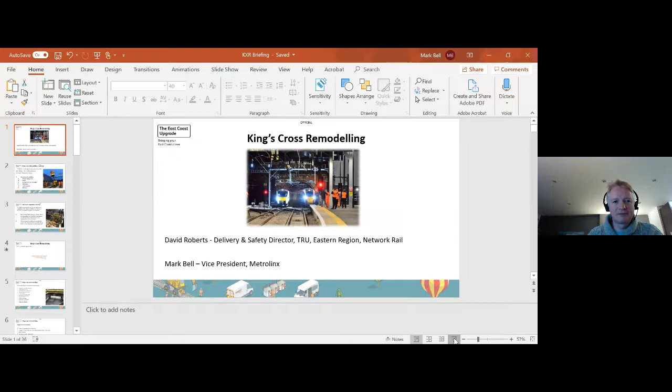Good evening, everyone. Just a bit of a brief background - David, I'm the delivery director for TRU at the moment. Going back six months, myself and Mark were leading the completion of the works at King's Cross. I'll let Mark give a bit of a brief overview of himself when he comes on in a bit.

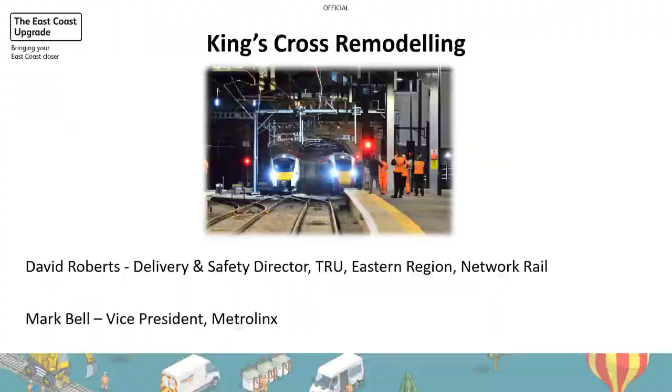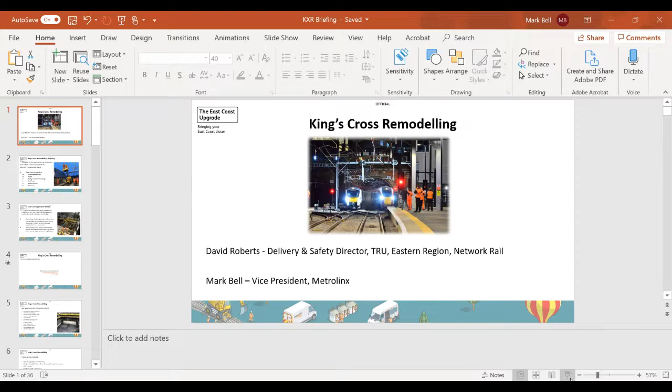At the time, I was the route delivery director for Network Rail on the East Coast. Tonight's presentation, we're going to run through King's Cross and the works that we did. We're going to go through the background, a bit on the scope, the challenges we faced, the civil scope in particular given the audience we're talking to tonight, the partial closure, which is one of the longest ones I've been involved in - a good 100-day plus closure, which was on top of a load of other quite significant closures we had during the works themselves. And then just a project summary at the end of the things we learned. So that's the idea for this evening.

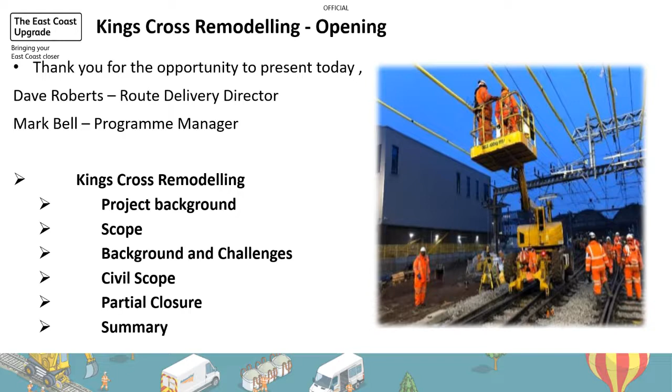In terms of the actual project itself, it's part of the East Coast upgrade, and effectively that's a £1.2 billion investment that the government, through Network Rail and the industry, committed to. Part of that was King's Cross, but it would be remiss of me not to talk about other works going on at the same time. These included Werrington grade separation, which is part of splitting freight off the main line just north of Peterborough - quite a significant scheme - and also East Coast power supply upgrade schemes.

The reason I mention these is that King's Cross at the southern end of the route was a magnificent example of civil engineering, but for delivering the benefits and everything else we're trying to achieve, it's a combination of all these schemes together that add up to the £1.2 billion investment, which in turn drives forward and delivers the end benefits to the new Azuma fleet we introduced on the East Coast Main Line, plus improvements on journey time and general capacity running in and out of King's Cross up to the north of England.

So King's Cross, in specific terms, involved a huge replacement of the track and overhead line structures, and also, for those who know the area, quite a complex signalling system as well.

And also we reopened one of the tunnels at the north end of the station, which again was quite a significant piece of engineering works. Mark will touch on that in a bit. Obviously, at the end of the day, without completing the remodelling works at King's Cross, we couldn't achieve any of the benefits that the power upgrades and the decongestion north of Peterborough have achieved. So it was in its own right a significant civil engineering piece of work, and I would say it was a once in a lifetime opportunity.

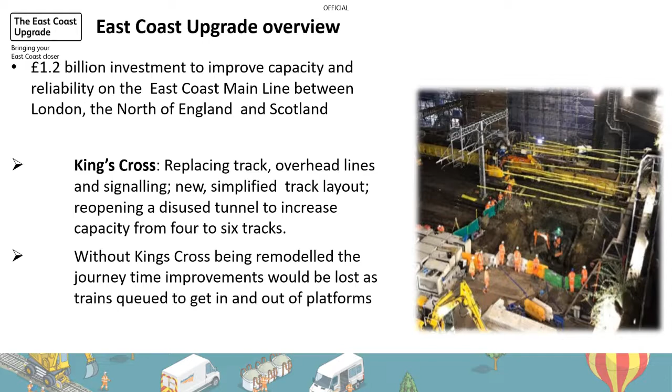Having now moved on to TRU, I might take a rain check on that and ask me in 10 years whether TRU is actually equally as significant an engineering piece of work. But certainly King's Cross is one of the biggest things I've done in my career, and Mark and the team were absolutely fantastic. So I'll hand over to Mark now just to play a brief video, which is just setting the scene a bit. Mark, if I could leave it with you, please.

Yeah, of course. I'll just play this first.

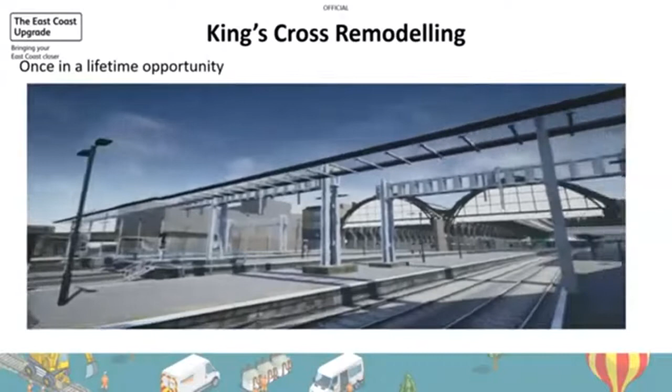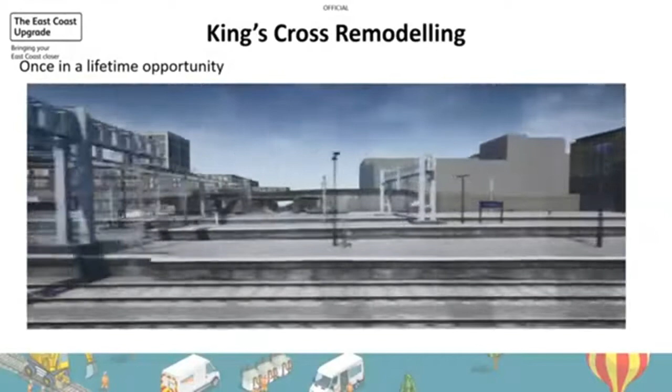Okay, thanks, Aran. Afternoon. So I'm Mark Bell. I'm proudly able to call myself the program manager for the King's Cross remodelling project. Definitely a highlight of my career. I'm a civil engineer, I've worked around the world on many rail projects, and this one was definitely a jewel for me in complexity and a challenge. But more about the project.

So as you can see from here, it was truly multidisciplinary. I think King's Cross has once been explained as close as you can get to major heart surgery on a railway. It had to be completely integrated with a one delivery staging to deliver all the multidisciplinary pieces of the jigsaw, from its geographical constraints to the access to everything else that we needed to bring together under one team.

So as you can see, it's got lots of civil elements to it - track, a huge amount of signalling, full electrification, remodelling, as well as platform works.

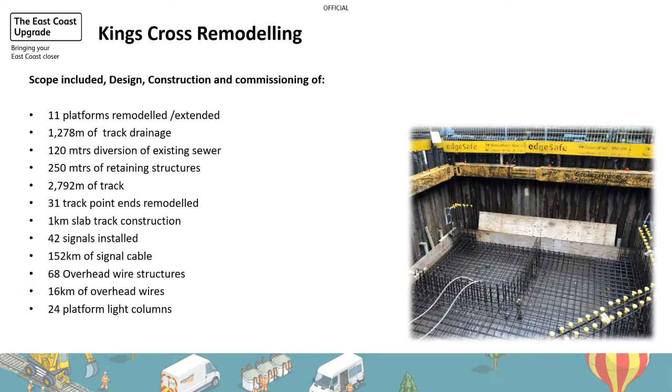Well, I'd like to take this opportunity to really say a huge thank you to all the parties that helped, and it was the one team approach between all these parties that was my view on how we made this project a success. Despite them being all on individual contracts, we did manage to create a one team approach. And there's evidence throughout - not just design, but planning and in construction and on site, even through to commissioning and testing - how everyone helped each other, and that came together at the end.

And as Dave says, in the partial closure, as we called it, and the entry into service for the new layout - without these partners being so collaborative and working together, we wouldn't have got close to it as some of the individual parts. So thank you to everyone who's been involved.

So we couldn't get away from not putting a rail diagram into a presentation like this. I'm sure if there's anyone on the call who's traveled the East Coast, you got frustrated as you think you've made good time entering into King's Cross, and then only to be held about a mile out, generally with a notice of 'we're waiting for a platform.' This whole layout was very constrained.

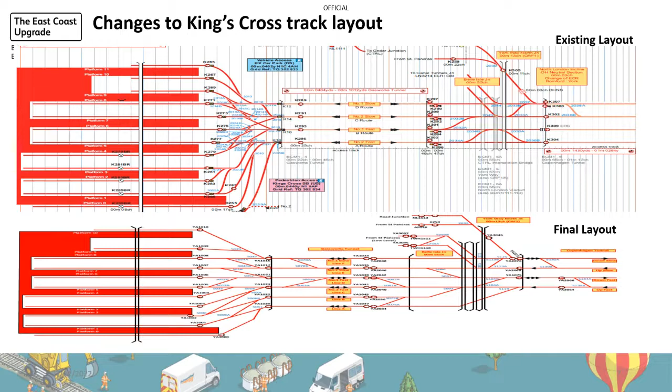So, about the overall timeline, designs did start way back. There's a huge amount of design work done - it'd be absolutely remiss to jump straight to construction.

And this is really where all the integration started. There's way over 100 packages of works across all the disciplines. We did use an integrated model and a fully integrated assurance process.

I'm sure if you spoke to people on the project, they'd probably find that a lot more frustrating than working in a single discipline design. But there's no way we could have brought this alive without bringing in that integration and collaboration in the design stages.

Another point is we had to design with the entry into service and commissioning strategies in place and in our minds, just from the way it was all to be staged. Our staging design to get something like this was always in place.

So across all those project partners and their design partners did a fantastic job to piece all this together, and under our Network Rail DPE and his office, who brought this all together with an LDO - a great feat in itself to get this design done.

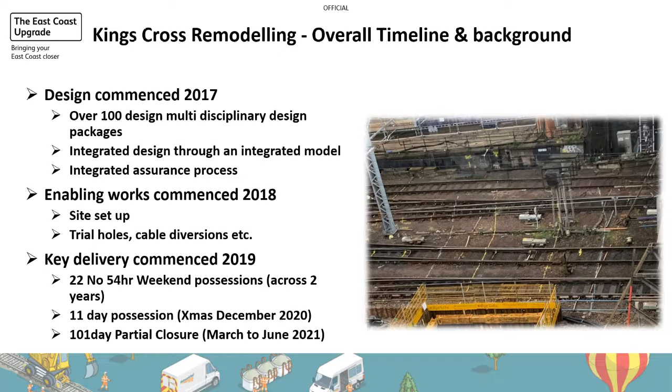Some of the challenges and some of the scope's challenges - it is a really heavily constrained work site. Two examples of this: we only had 2 gates to get in on one side and 1 on the other, for vehicles. On one side they were 2 miles apart, and on one side in the throat. So gaining access is very difficult.

And when you did get in through these gates, when we did bring plant into the corridor, we were literally getting onto track - there's no real cess to talk of on one side anyway. So it was really heavily constrained.

And then of course, for those who know King's Cross, we got Google building their headquarters right next to us - major building works. So just the road network, the delivery network, everything was so populated and so constrained.

Thames Water sewer running across the site - I've split this one out because it was a fantastic piece of work, really well done, but very challenging.

Of course, we had to keep King's Cross open and operational throughout, and that's not just passengers and moving passengers and trains - all the deliveries for all the shops and the coffee shops and everything else that comes into King's Cross, we had to coordinate with all the time.

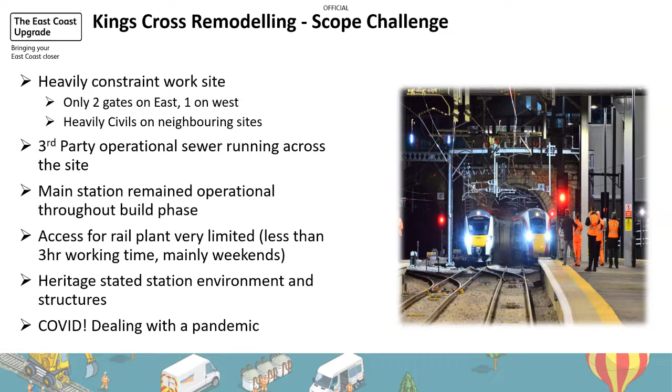So I'll say up front, the secret to our success for all of this is acting as one team, but planning. I don't think I've ever worked on a project that took the planning of our works so seriously and put so much effort into it. And on reflection, I can't see a bigger influencer than us planning our works.

All of our work started at T40, where we could, where we knew about it, and we continued through 26, T-12, 8, 4, 2, 1. This project didn't treat it as just a meeting and a gateway - they were real big challenge sessions. We had dedicated teams to drive us through. Our principal contractor team really helped us work through, guiding us literally minute by minute across these, regardless of whether it was the 100-day plan, a 10-day, or a 2-day plan. This was the secret to our success.

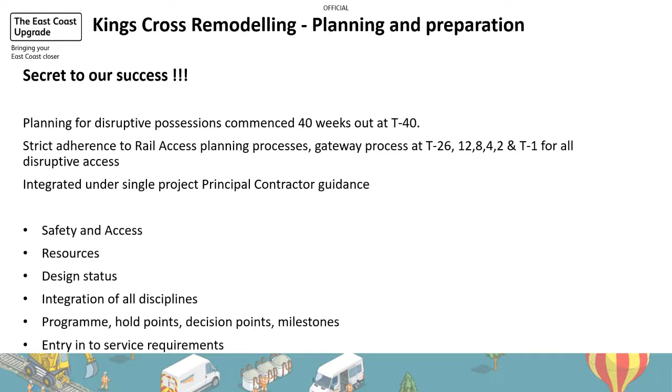And all of these, no matter which discipline was leading and which one was working, were all treated as a single project trying to deliver. So we had one entry into service for the weekend, we had one program, we integrated everything we could. So it really was the secret to success - I believe it's the secret to success for delivery of projects inside the rail corridor.

I've specifically picked out three large bits of scope that we did, globally for the partial closure. I hope you can see the photographs when we get to them, to do it justice.

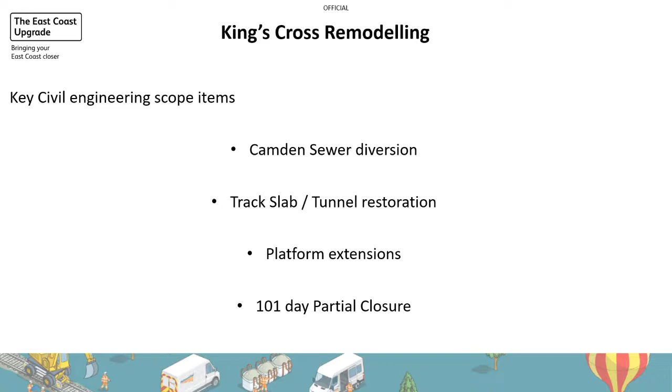The first one is Camden Sewer. If you don't mind, I'll flick to this so I can talk through the notes. But Camden Sewer ran on this yellow dashed line. It ran right across the corridor, across all four tracks, and actually right underneath lots of crossovers.

And the levels it was put at were very shallow underneath at some point, and there was actually a hump in the track to get over it. It wasn't very easy to maintain the track, and also for us to then go and realign the whole junction to the layout I put in earlier - that wouldn't have been achievable with the old sewer in place.

So we realigned to this other blue one with the green chambers, which you can see across the track, to line up from D, which went into the outfall, and A which went into the outfall. So it sat directly underneath all the tracks. The connection pits being A and B, you can see are just either side of the tracks. They were very close to the running rails, which obviously made it a different safety constraint for us.

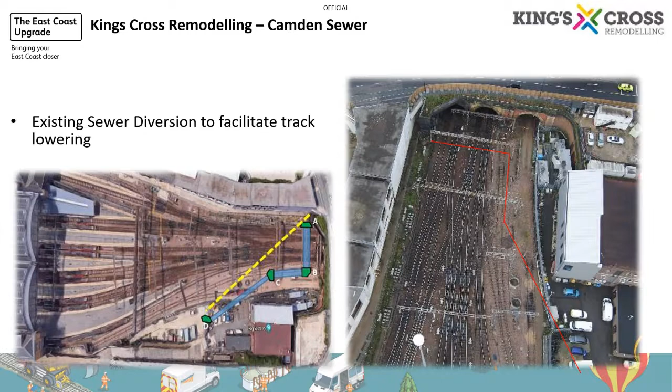So again, planning came into that, and I'll touch on it in a second. I think the photographs probably just help explain that really - you can see in this picture on the right hand side how close the running rails and the live operational rail was to our works. It's significant, adjacent line open operations.

Site access was really restricted. The King's Cross signal box, for those who know, is right next to where we were on this. At one point we had to change to working in white periods because of the vibration of putting sheet piles in. The excavations, the spoil, had to go out in a certain way. We had to load trains at night time underneath the wires. It was a really constrained piece of work to get such an engineering solution in play for all of the non-possession works.

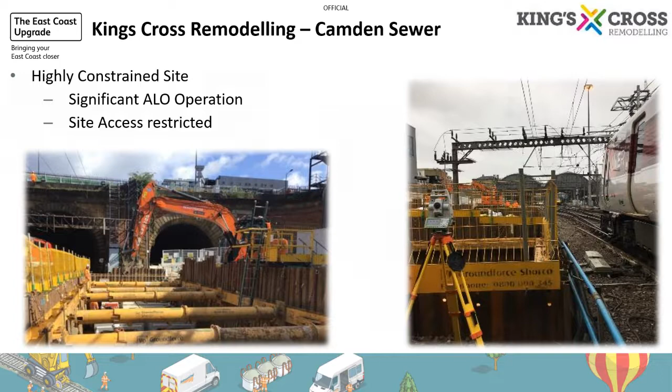This is on the west side of the track - this is chamber A. This was painful for us to dig in really tough stone, basically rock. The ground conditions were really bad.

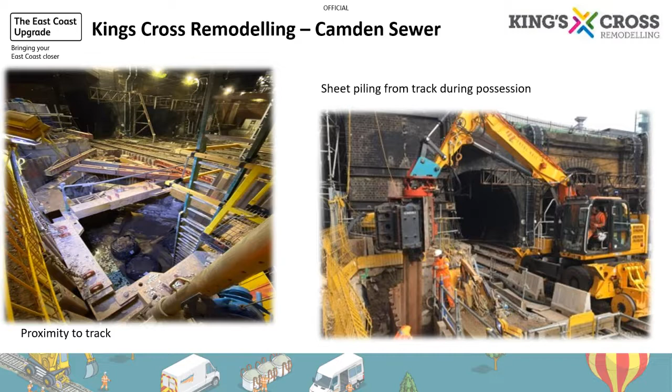So it was slow for us to dig, and when I say we were digging, unfortunately it was almost with hand tools, because you couldn't get machinery in there from such constrained sites - we were literally lifting buckets out at a time and taking them away. And of course, we had to go in to weekends, so we did utilize some of those weekends to bring on track plant. It was the only way we could get in, and therefore that was a demonstration of shutting the railway down where we could take advantage to build some of these things.

This next bit is a video of Christmas 2020.

This is the 10-day closure, 24th of December start to the 3rd of January. For those who can remember, this was the Christmas when COVID rules around travel really hit the headlines. Our plan got changed pretty close to Christmas, although it was in place.

We had to work together as a team to change the plan. We had to open at least two of the fast lines by the 31st, and open all 4 lines by the 3rd. To top it all off, Storm Bella hit us on Christmas Eve. I say that because I'm still in awe of the people on site who worked through that, amending the plan on the night using forecasting of the weather coming in. Again, admiration to the team for their planning. But there's a video which was basically the final connection across the 4 tracks.

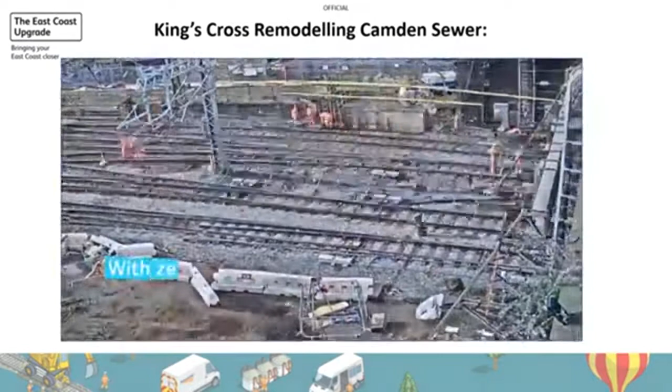I think one of the captions did say about handing back early and getting confidence from our industry colleagues in how we were planning our possessions. That 11-day blockade over Christmas gave confidence that we were actually able to deliver what we said, and that gave confidence to the overall industry that when we came onto the 101-day blockade, we had a track record and were managing efficiently. So I think that's a key point for that Christmas.

It was a good trial, as well as being a fantastic civil engineering experience. It was a real test of whether we could deliver major possessions back on time, so one we carried out through the rest of the programme. Thanks, Mark. No worries. Thanks, Dave.

I'll move on to the second part of our civils piece, which I've picked out: platform extensions. Most passengers and most of the public will never get to see the track work or the signalling we did. I'm sure they're grateful that it works, but the platforms is where we always knew people would see the major difference. Ultimately, we needed to remodel the ends of each of the platforms, of varying lengths, to straighten out the run in and run out. For those who remember King's Cross's old platforms, they were very curved, almost C-shaped in some as we move further east, so a huge amount of demolition and remodeling of them.

These were particularly constrained. King's Cross, affectionately known as the Queen's Gate on the east side, that was for one access, and on the other side through the Google building - very, very constrained for us. Of course, we had to protect everything within the station - a huge lesson learned throughout - and then there were safety and environmental considerations.

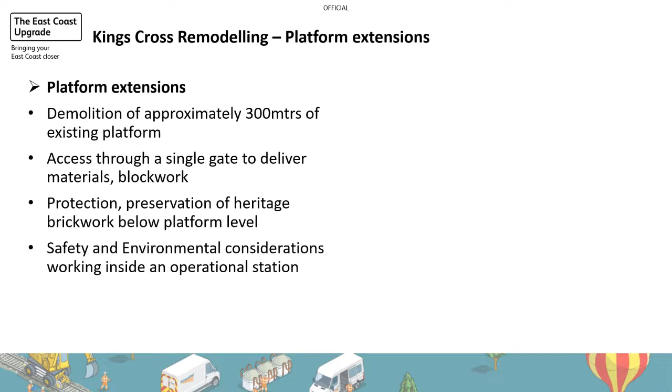Some photographs here, hopefully they do it justice, so we can see the size and extent and amount of protection. On the left hand side, the white wall was for us to create a whole working environment outside of the public view, and you can see the passenger trains there. In the picture on the right you can see protections for the signalling and the track, and the concrete pump we had to pull in, which was pumping all the way from inside the station, just because of the restrictions bringing concrete in and the logistic issues.

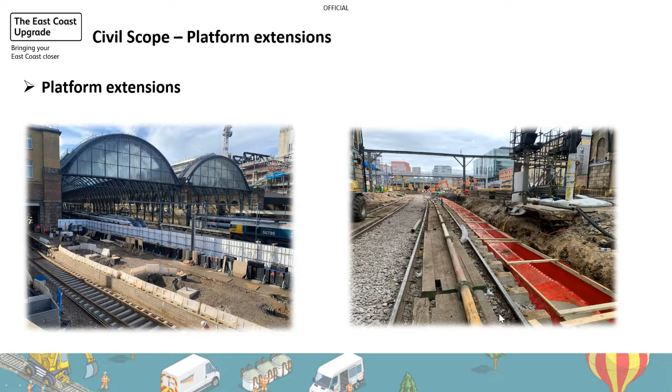Again, some extents - you can see where the coping stones are, so way into the train shed was the extent of the demolition. And as you can see there, we were well inside the train shed before the demolition and the remodeling.

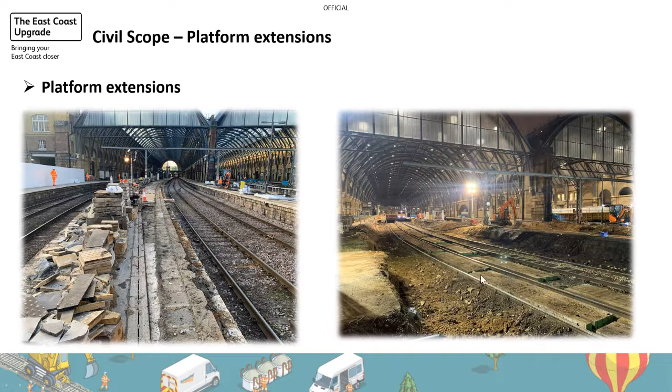This was made particularly difficult because it's the end of the line, and I'll touch on it later when I talk about the partial closure. For the engineering trains support, as you can see on the right, it was difficult because we had to stage all the track to be left in, otherwise we would have got landlocked. So even though we said we had 100 days to do the partial closure of the platforms, in reality we didn't.

We had 8 to 10 days to demolish all of the platform, get rid of all the spoil, and bring in what we could on trains. After that we were landlocked, because time was required to start ripping out the junction, the trains and the track.

On the other side, on this far side, it was very constrained, very tight, single line working, one platform at a time. We couldn't take the same approach as we could on this side with bigger space.

Huge. I think the logistics was the most impressive part of this. Apologies, I can't remember the exact number of blocks and cubes of concrete, but it is huge - we're talking 8 to 9 hour concrete pours. Surfacing materials took 15 hours to surface a platform for each course we put down. We were going for extensive durations for each of these stages within our plans.

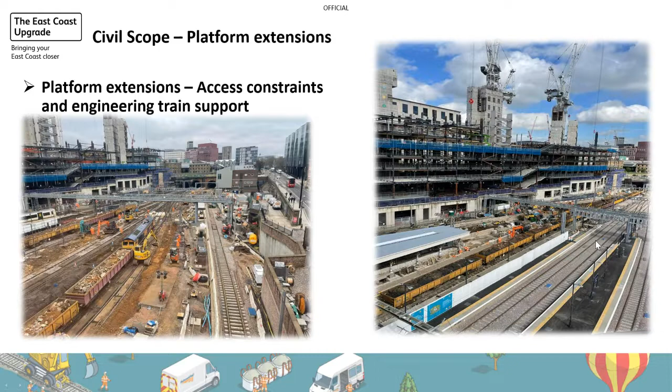The third one I've picked out is the slab track. So you've seen on the first video, and Dave explained that we opened up the East Bore tunnel and placed track through it to then increase the capacity and the access and egress into the station.

The photos I'll show do it justice. As you can see, huge numbers - 10,000 tons of spoil removed. That was over 30 engineering trains overnight. For those who have done it, you'll know it's no mean feat to fill a train safely under wires on an engineering shift. To do 30 of those without incident is absolutely fantastic.

The access to do this was approximately a kilometre away, and in most cases literally a one-in, one-out coordination was required. Planning of our deliveries went down to the minutes - there were holding patterns, and every piece of kit that came in through that gate was coordinated.

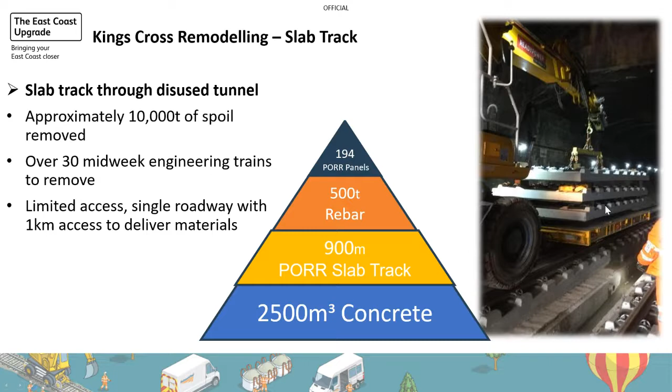As you can see from the picture, the slab track was brought in panels and then stitched together. But way prior to that, thank you to the people who've been there for the 40 years prior, who used this tunnel as a bit of a dumping ground for all spoil and other activities. You can see from just the shape of the profile, and from these photos, how the spoil built up the sides and the size of the tunnel.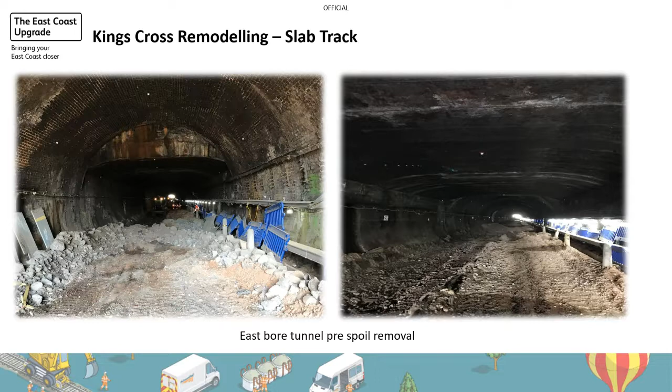If I then show you where we had to get it to - the amount of pride that this team took in getting this to this level was amazing. I genuinely could say you could eat your dinner off the bottom of that tunnel.

It's worth mentioning here that closer to the King's Cross end, the canal goes over the top, and before we could go in and do the OLE overhead wire works here, extensive waterproofing works were also carried out in this tunnel and other tunnels across the whole. There are three bores, but it's really a huge amount of work just to get it to a state where we could then start to build it up.

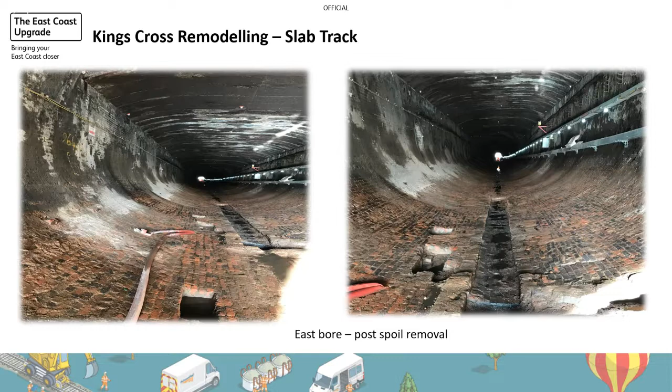A fantastic piece of work.

It's also worth mentioning the monitoring scheme. Because of the sheer amount of work going on in and around the King's Cross area, with extensive building works above, there's been a monitoring scheme in place for many years. By excavating that tunnel and putting a monitoring scheme in place for its settlement, that was an extensive piece of work. It was set up remotely with triggers, so our engineering team would get called off their phones to go out and inspect. We had surveyors out all the time, so we knew the behaviour of that tunnel throughout, as we were unloading and then loading it with spoil.

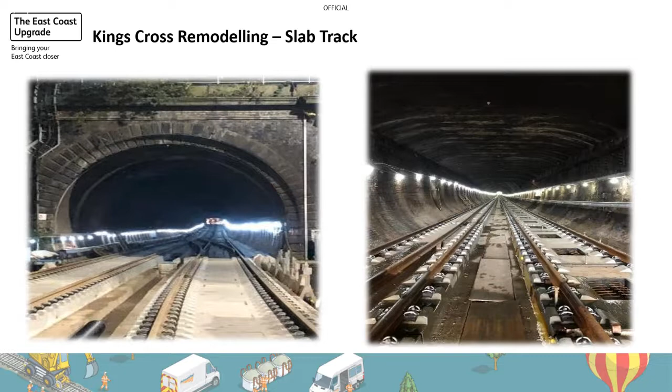Around March 2020, if my memory serves me right, the East Coast Rail industry and partners - Network Rail, the train operators, DFT, as part of the industry board that was set up - got together to understand what the overall strategy for King's Cross and the climax of the East Coast upgrade would be, in light of the COVID pandemic. We wanted to explore the opportunities of lower ridership at that time and how we could take advantage of it, and whether there was a way to deliver King's Cross.

Several plans were presented throughout. It was a very open industry challenge. Of course, I would have liked to just say, can we please shut the whole of King's Cross down, all lines, everything, for so many days - that would have been the easiest way for us, but we're not quite on the same page as operations. For obvious reasons of still moving passengers, King's Cross was to remain open.

Around June time, the final piece of that jigsaw was set of how we were going to bring King's Cross remodelling to a close, and the agreement was a 101-day closure. Never seen anything like this before, of this importance, especially in King's Cross.

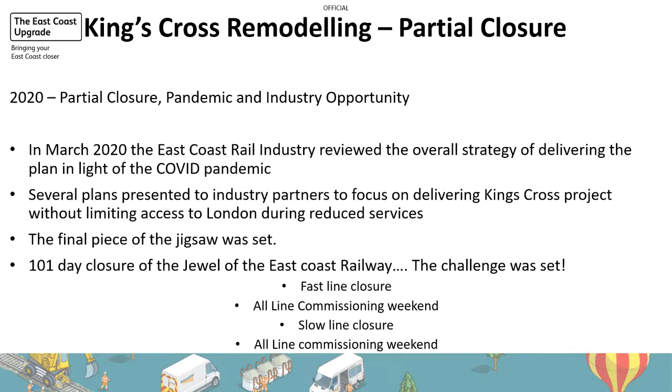Everything was considered, and at that point the planning was set, and we really went into our planning stages. The level of planning, despite it being 100 days, still went down to machine movements, to the minute - planning, contingency plans, milestones. Everything was considered at that point.

The strategy was really underpinned by three things. We had to keep the station open. We had to sequence the work to maximize engineering trains. And we had to allow for the signalling and electrical commissioning strategies - how were they going to come back into service? That really dictated the 50-50 split between doing east and west. Those three things underpinned how we were going to approach this. I've probably not mentioned a huge amount of people, but the key things were the platforms, all the track, electrification, and the signalling. There was a huge amount of other work that took advantage of closing the railway down.

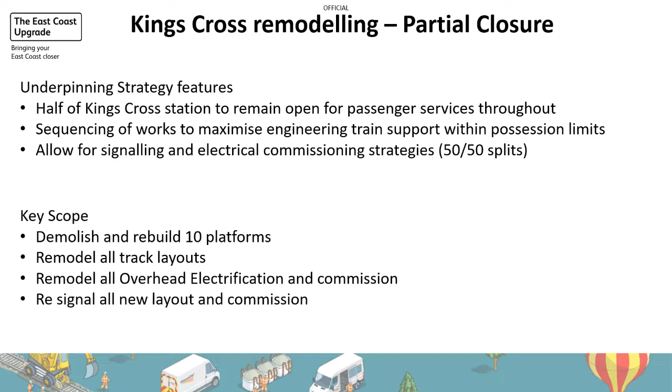Key challenges - and I purposely left safety to this point. Safety throughout the project was always paramount to us. The constrained work site was probably the hardest part of the safety challenge, especially in COVID times, working 24 hours a day for 100 days, over 500,000 hours spent. We had to put so many COVID restrictions in place. Unfortunately we did have some COVID cases throughout. We had protocols to deal with that and looked after our workforce as much as we could, and the companies I mentioned earlier were fantastic in supporting not only the people but the project.

There's a real challenge to us - fatigue within those 100 days. The excitement and enthusiasm from everyone was fantastic, but that could also be an issue because everyone wanted to be on every shift. We had to really roster a huge draw from around the country for this project, from all angles - plant, people, everything. So it was really important that we kept on top of welfare and safety.

Logistics. We had planned for 100 trains but ended up with 103. It was very difficult because of the one way in, one way out, and the logistics involved. For half of the 100 days, we couldn't get more than one train in the possession, so you literally had to work it, bring it in, use it, send it, and then bring the next one in. I've already touched on how difficult access for delivery is.

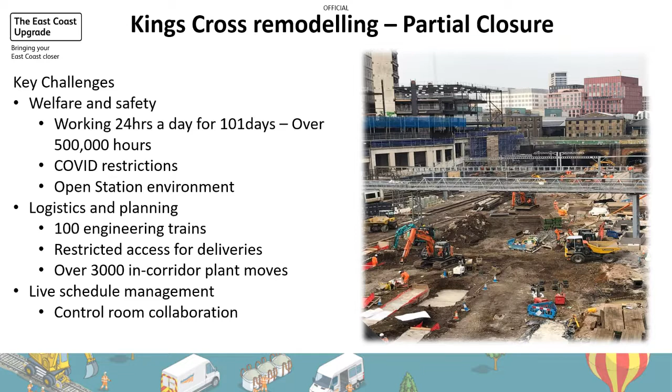Dave mentioned earlier it was because of the success we had at Christmas, it wasn't a difficult conversation to have with the exec and our industry partners, because they had confidence that we were managing it. Although you could see there was a huge hole at one point, probably half the size of a football field, the confidence in the plan that everyone was working to really led us to know we were at the stage we should have been.

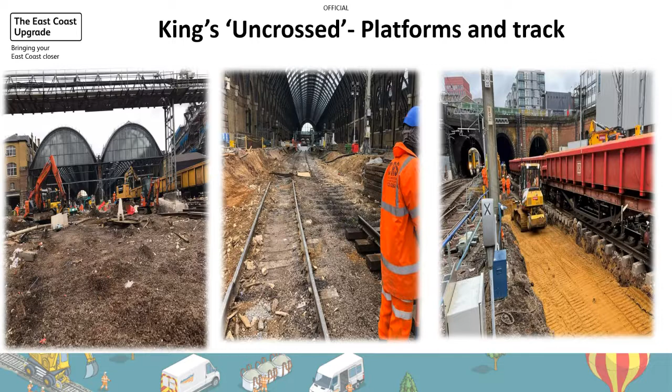Logistically and from a time point of view there were obviously constraints, because they had to follow the track layout going in, and of course all the civils had to be complete first. So this team waited patiently on the sidelines for the infrastructure to come ready, and then they really did focus in. It was great to see.

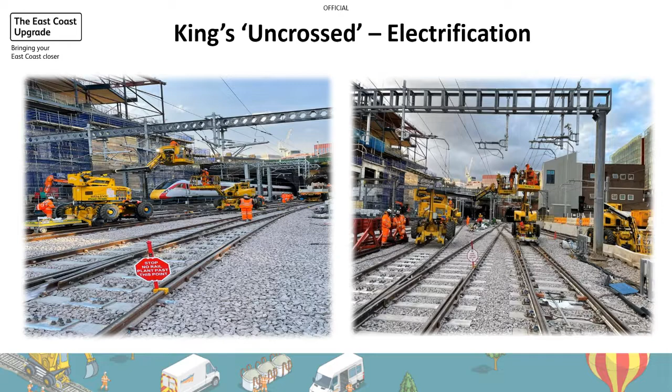In this picture you can just see the sheer amount of yellow plant and orange vests, and then our track going in on the new platforms.

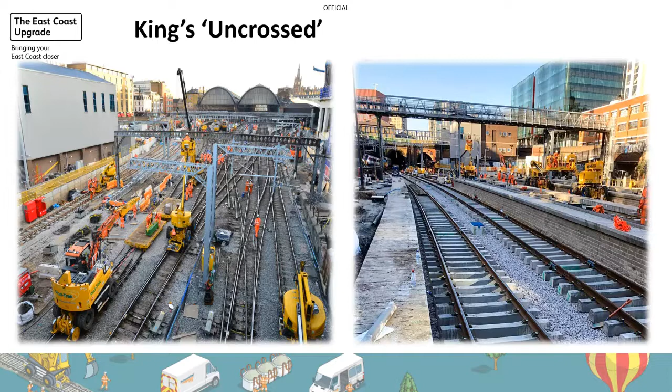Another time-lapse video, I hope this one comes through. It hasn't come up yet, Mark. No, it hasn't. Perhaps we can come back to it at the end, maybe.

Yeah, we can just see that slide. I take it that's not just a link you can click on or fire it up. Okay, give me one minute. Sorry. No worries, mate.

How can I? Should we come back to that later if we can? Yeah, I'll see if I can get it back on. Sorry everyone.

Well, we can clearly see the scale of the project and the massive amount of work done. Is he just frozen, Mark?

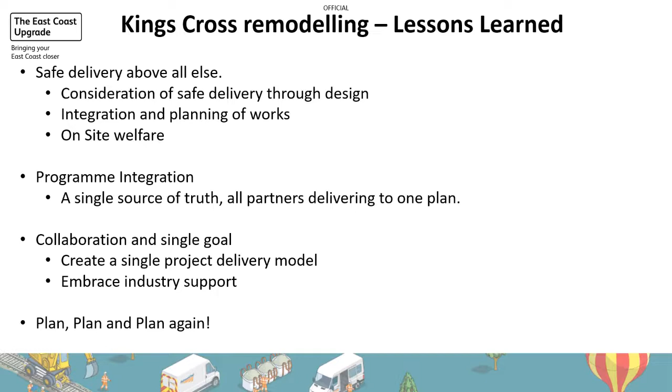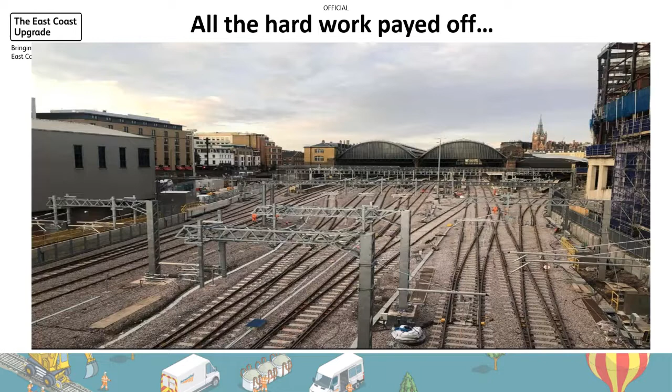And there's the final layout. I'm sure it was a brighter blue sky than that on the day, or it certainly felt like it when I took the photograph. But yeah, that's all the hard work.

Thanks, Mark. Okay. Yeah, industry collaboration. Mark has talked very much about the civil engineering aspects, and credit to him and the team. Without them, this project would never have happened. And I can touch on that at the end a bit more. But I think it's really important to remember the industry's part in this as well.

We weren't just doing the civil engineering construction aspects. We had a really close working relationship, as you would expect, with the various operators. And actually the journey and passenger handling experience was absolutely fundamental in terms of making sure that, again, we could actually operate the railway during the various stages that Mark's outlined.

And certainly, given the pandemic that we incurred during the construction phase, the ability to manage the customers during the various ebbs and flows, and we had to adapt the plan all the time just to reflect what was happening, was a credit to everyone.

But the key thing I'm really trying to emphasise here is there were over 50 people working alongside the industry to help this happen, and really without them, as I say, whilst it's a civil engineering sort of discussion tonight, without those kind of people, we couldn't facilitate the access we got and all the other opportunities we explored.

As I say, the passenger handling and messaging was some of the best I've seen, and certainly in the Modern Railways Awards for this last year, 2021, the Innovation Awards, we actually got a Major Project of the Year award, partly because of the engineering feat that we achieved, but very much so down to the passenger handling message that was going out there. The other thing to remember is, again, why the hell are we doing this?

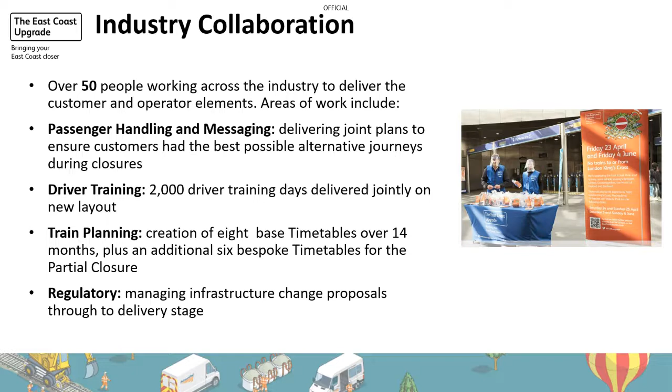Mark and the team did a fabulous job to bring it all together as an integrated programme. One of the most complex things, other than the engineering, was the train planning. The route colleagues who helped us plan this had 8 base timetables over that 14-month period, and 6 bespoke ones for the partial closure. It was immense, and the time and effort from train planning staff was significant given it's a scarce resource. Given the COVID environment, we had pressures across the eastern region and nationally on managing resources and priorities. The way we brought this together is a credit to everybody's willingness to work together.

Ultimately there were also the regulatory aspects, the CSM aspects of bringing this new infrastructure into play. The relationship Mark and the team had, and getting the confidence of the regulator and other safety bodies, you can't undermine that on a scheme of this nature. A fabulous achievement - if it was done outside COVID, this would still be one of the most immense schemes I've been involved in, and I'm privileged to have had the team along with me. But to do it during COVID with all the restrictions and added burden that brought on everyone, in a changing, shifting landscape, the way the team adapted is a credit particularly to Mark. Without him, this project would not have happened. His behaviour generated throughout the whole team and the supply chain enabled us to deliver a really complex scheme.

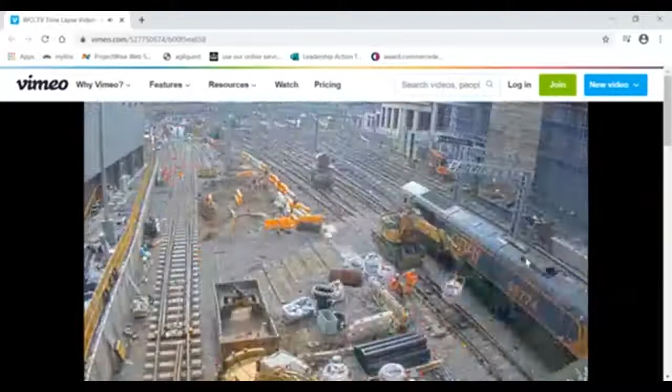Just for people's benefit, the left-hand side is the new track going into the new tunnel we are creating. So if you're looking at the video, that's all the new area going into Platform 0. And then as you look towards the right, that's where the Camden Sewer went in, and the rest of the track layout as you go into the throat area.

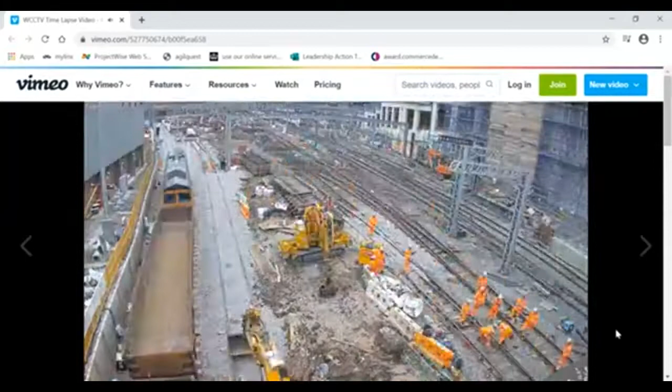This is during the main 100-day blockade—remind me, when was that, what time of year? I think it was February or March through to the 7th of June. Yes, this is March. Just before we started this, we had Werrington going for about 10 days as well, so anybody traveling on the East Coast during this period would have been unfortunately quite disrupted.

Yes, I was, but good end result, so well worth it. And actually it was quite well managed, to be honest, with the travel arrangements. Network Rail published it very well, and you could get the Thameslinks up to Stevenage and bypass this, then get a train north from there. It was all very well organised, and that's the key thing to enable us to do this.

All that planning—I know one or two questions asked how you do it. Those are important things, because otherwise we'd never have got the blockade timescales, but we managed to secure it. With publishing these things, people can make different travel plans and be aware of it. I've noticed a lot of large projects do this now—when there are blockades, they publish it well in advance so people have options. They can choose to do something different that weekend and not travel through the area. So it just helps.

People like certainty—I think that's the biggest lesson learned. As long as you give them certainty and can manage it, then I think the view is you can put up with some disruption. Definitely, yeah.

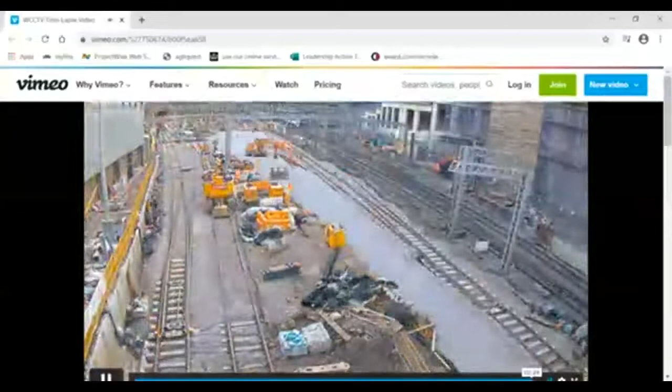And obviously it's a major one-off here for King's Cross—you're not going to have to touch this now for 60 years probably. Plus, with the extra tracks, you've got extra flexibility as well, so it's all round a massive improvement.

Okay, we've got a few more questions here. This is very good in the online environment—it's a shame you obviously can't get the reactions from the audience, but we've got some good questions here, so I'll carry on running through these if that's okay, David and Mark.

We've got a question: how did you manage temporary works on such a complex multidisciplinary project? It says this is normally overlooked on railway projects—we all concentrate on the permanent design, but the difficult temporary designs to actually build it can be quite key. Yeah, similar answers.

Promoting temporary works was the initial answer - not getting your design and then staging afterwards. Part of our design submissions throughout, even at IDC level, was the identification and coordination of temporary works, which went through exactly the same processes as permanent designs. We took lessons from people putting a lot of effort into permanent designs and integrating them, then individual disciplines were allowed to run and do their own temporary works. We changed that, which probably added a little frustration due to the sheer amount of reviews everyone had to do on other people's designs.